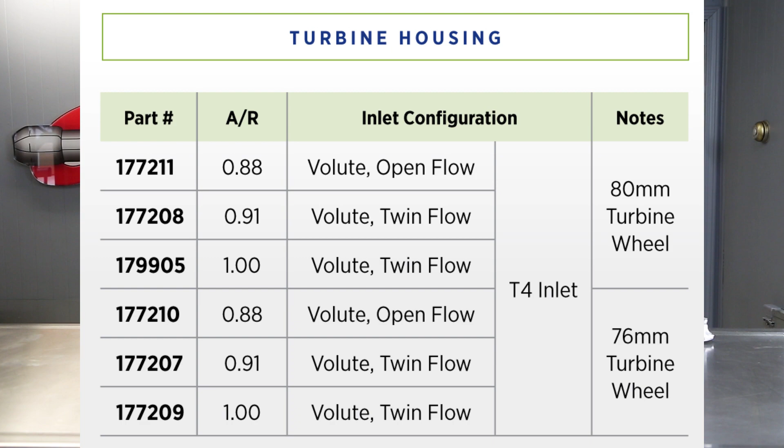And then they're not listed, but with some modifications, Area Diesel can supply wastegated housings if you're looking at a towing application or something like that. All the SuperCore options, mated with all the turbine housing options, gives you a wide variety of coverage for this range of turbo.

When you hear the term S369, they're talking about a BorgWarner S300 model turbocharger with a compressor wheel in the 69mm diameter measurement. So that's really all S369 tells us. It doesn't tell us what size turbine wheel you want to run. It doesn't tell us what AR turbine housing. And it doesn't really tell us the characteristics of the compressor cover. How does everything connect? Okay, so lots of options.

How do you know which option is right for you? That's a tough one. A couple of ways to do it. One is to have years of experience, trial and tribulation, and just know what combinations work with what applications. It's one of the value-added services of reaching out to Area Diesel Service. If you tell us what you've got and what you're trying to do, we've got a real good idea of what it is that you're going to need.

Beyond that, we'll drop you a link to BorgWarner's MatchBot program. It's a little overwhelming, but it is the industry's best publicly available turbo specification tool. Go through, fill out all of your particulars, and it'll tell you what it is you're going to need for flow out of the turbocharger. Compare that to the maps in the catalog, and that's going to give you an idea of what it is you're going to need.

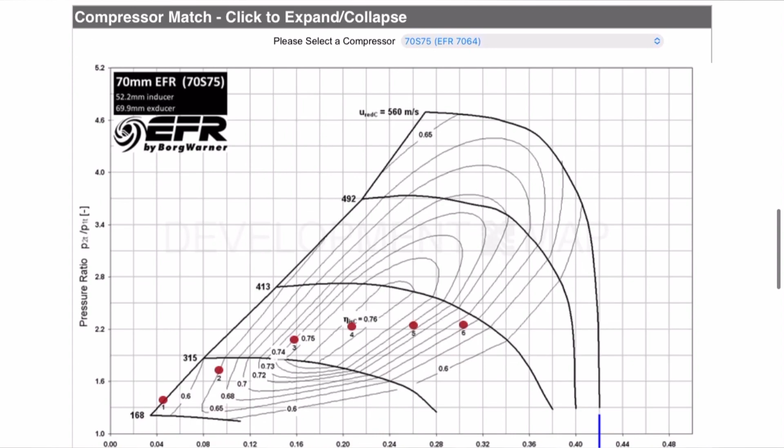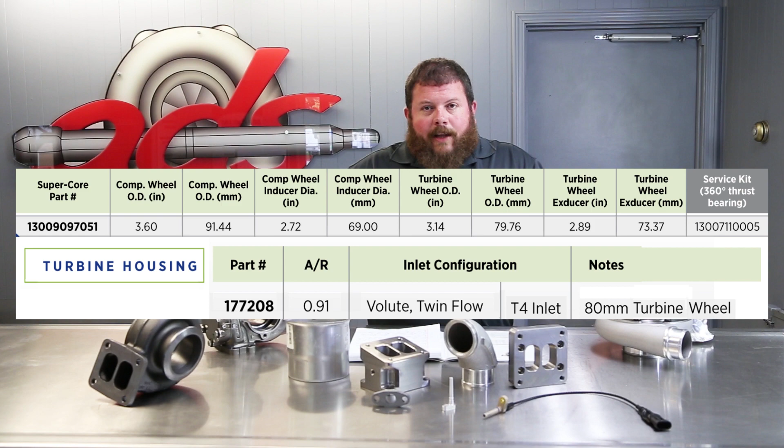This particular SuperCore is an S369. It's on the 80 millimeter turbine wheel, and it's running a 0.91 AR turbine housing. So that is the assembly that we're talking about today. This particular configuration is another collaborative effort between Area Diesel Service and CNC Equipment. So Clinton reached out and they're getting ready to build a truck and they need a turbocharger for it.

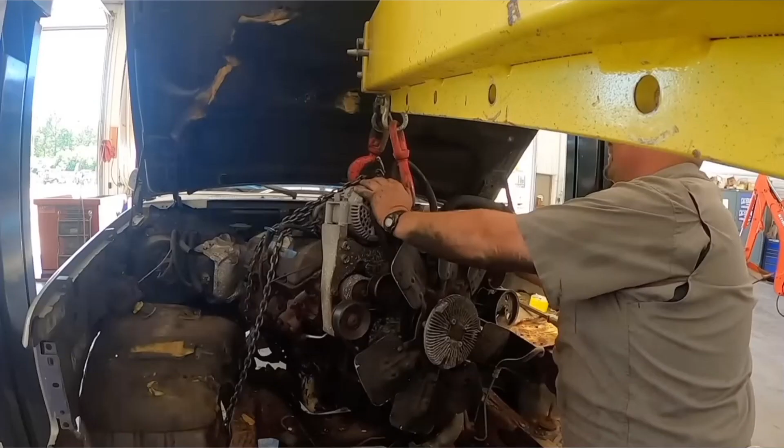If you've been watching Clinton's channel, you've seen a number of videos about an F350 they're working on. This is the truck that was cut in half on their channel. Originally a gas engine. They've got another donor where they're going to acquire the rest of the frame, and then I believe a third donor where they're going to come up with the 7.3 liter engine from. So Frankenstein, if you will, and they're going to arrive at a 97 F350 four-wheel drive Powerstroke short bed truck. So a configuration that was never offered from the manufacturer.

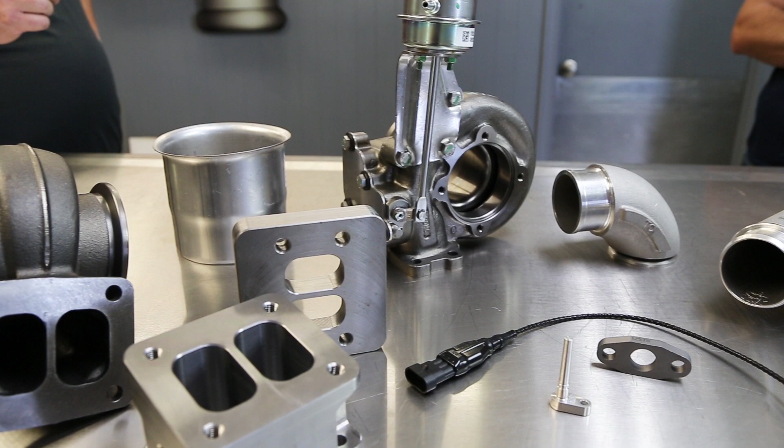Pretty cool. So in order for us to specify or configure a turbocharger, there's quite a bit of information that we must learn and understand. What is the engine? How much displacement? 7.3 liters of engine displacement. At what RPM will the engine be operating? What type of fuel delivery or horsepower is going to be made? What is the application? Is it a tow rig, a pulling rig, a grocery getter, what have you? And finally, what are the goals? Longevity, reliability, performance, all of these things kind of go into the recipe to specify the right turbo for that scenario.

So the guys over at CNC are doing this one proper. It's going to be on a low mileage, 48,000 mile, 7.3 liter Powerstroke. They're going to pull the engine down, reseal everything. We think the combustion chambers are good. They are going to do head studs, valve train upgrades, base engine for the most part remaining stock. 25/100 hybrid Huey injectors going in this thing, being fed with a performance high pressure oil pump, and engine going to be tuned and calibrated appropriately. That's kind of the rundown for the build. They are going to modify, go to a T4 style pedestal to accept the BorgWarner S300. That kind of tells you about the modifications that this turbo is going to be facilitating.

So at this point we've understood Clinton's application. We know the modifications that have been made or are going to be made to the engine, and that's obviously a significant part of the puzzle. The rest of the puzzle, the goals, right? What are we trying to do here? We're looking for something that is going to have excellent throttle response. Transient response is going to be good, no lag, if you will. We want something that's going to be reliable and have a long life in this application, and we want something that's going to be cost effective. And with all of those application situations and requirements, that is what we have arrived at: BorgWarner's S300SX-E 69mm compressor wheel inducer on the bigger option turbine wheel with a 0.91 AR turbine housing. That is the combination for Clinton's situation.

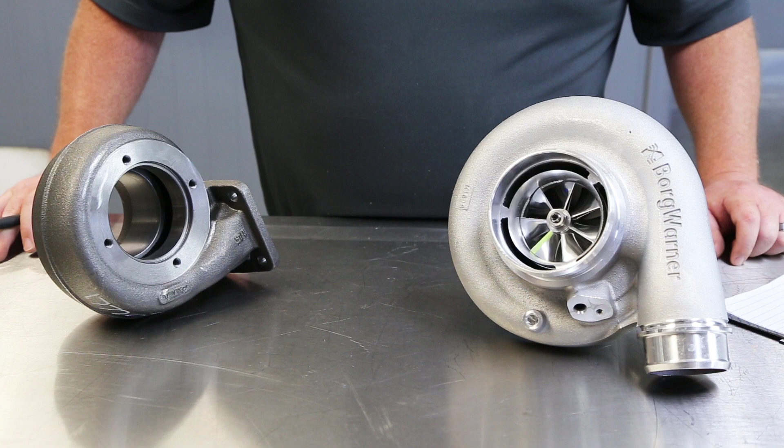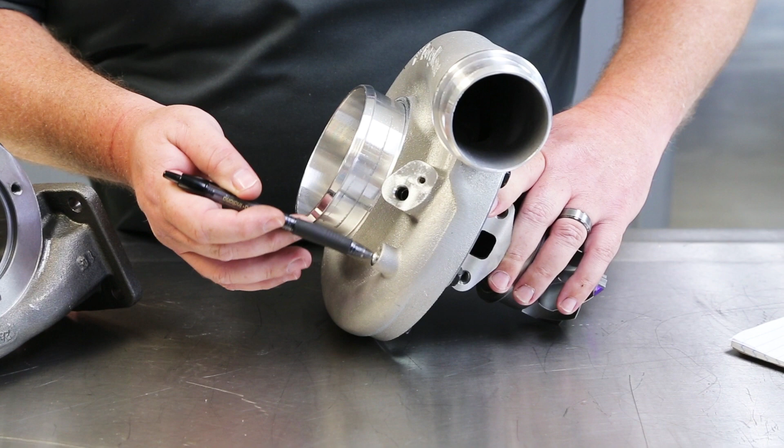Alright, so we'll bring you in a little closer and we'll take a look at some of the particular outline components of this turbocharger. So we talked about the E in S300SX-E being enhancements, right? So 360-degree thrust bearing inside the cartridge, forged, milled compressor wheel. The other enhancements come in the way of the compressor housing. Boost port, this has been machined and tapped but not drilled through. Same situation with the speed sensor port. The features are there. If you go to utilize the speed sensor, you'll need to finish the machining, which is effectively just drilling out the bottom of the passage. Then you can mount your speed sensor.

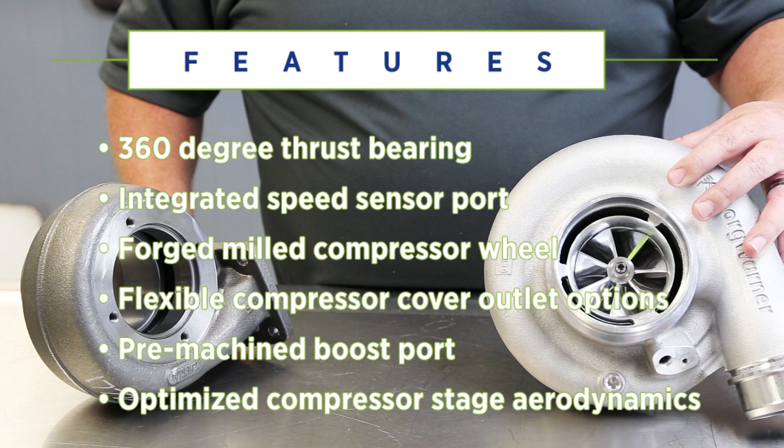The other awesome enhancement they've done, the turbocharger comes with a hose barb compressor discharge, silicone hose and clamp. But if you don't like that connection style, you can machine off the hose barb and you'll reveal a V-band style compressor discharge, from which you can get any number of components made up to that surface, go back to hose, go hard plumbed with your own custom piping, but you now have options for getting the air from the turbo into your engine. Those are primarily the enhancements in the SX-E line of turbos, and it has been well received. This is an awesome setup for you custom builders. 4-inch compressor inlet, readily available components, 2.5-inch compressor discharge, again hose and V-band configurable.

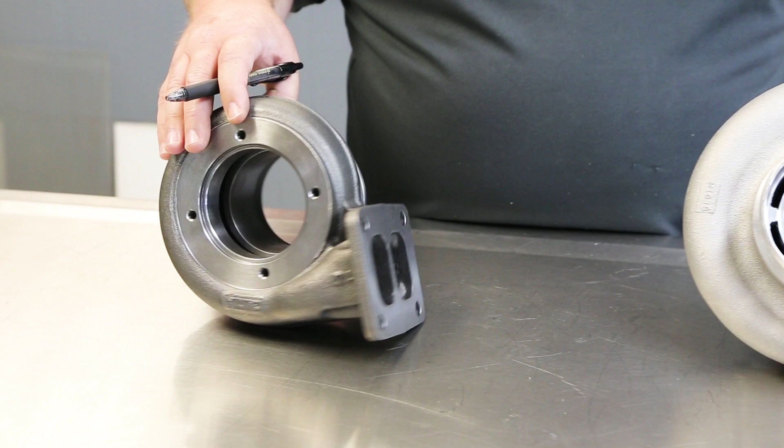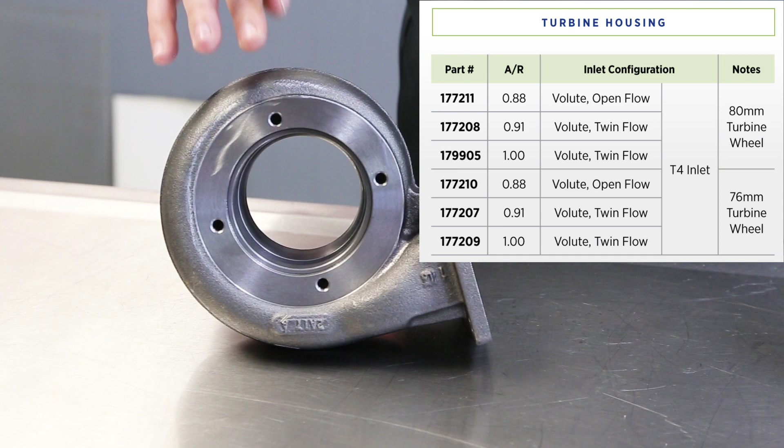On the turbine housing side, again this is a 0.91 AR turbine housing. This is of the T4 foot variety, and there were two other factory options, one smaller, one larger. So again 0.91, you can go down to a 0.88, effectively restricting the flow of exhaust, speeding up the velocity, driving the turbine harder, or a 1.00 if you want to go on the looser side. For this particular combination, 0.91 is the solution.

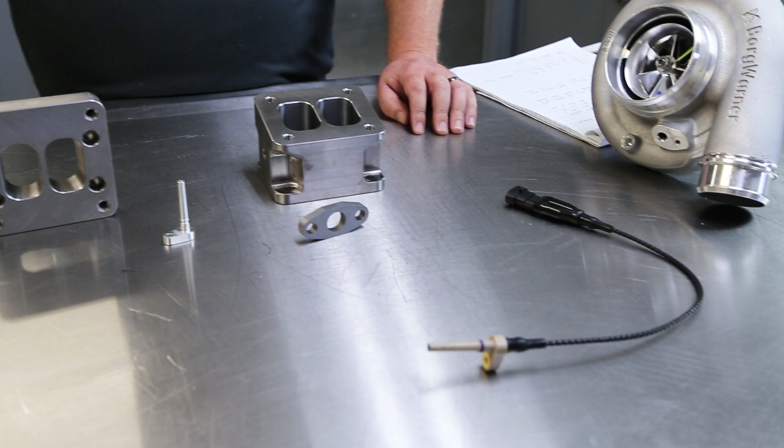All right, if you've made it this far along in your project, you're about to need some additional components. We talked about the speed sensor port on the compressor housing. Again, it's not machined out, but should you choose to measure turbo speed, we've obviously got speed sensors for that, gauges if you are looking for an instrument there. If that's a dyno-only measurement and you're done with the speed sensor, we've also got a plug to close that port back off, seal it up, O-ring and bolt go with that.

If you are plumbing your oil connections, the inlet is just 1/4-inch pipe, that's pretty easy to work with. The drain is flanged, so we've got the flange in a variety of different combinations, gaskets to bolt it up. You can weld off of this, or we've got them that are tapped and available. You can work with pipe thread there.

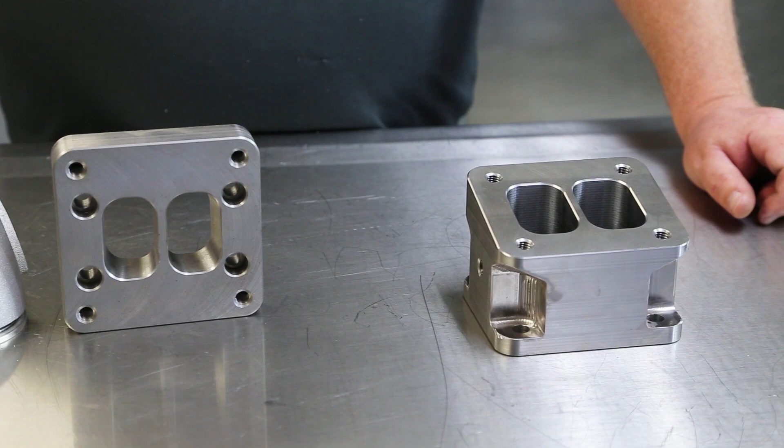Mounting it to your engine, several different options there. You may have an application with a factory T3 size exhaust manifold. We can convert that to T4, so you can mount this turbine housing to your engine without an exhaust manifold replacement. Rollover block, perhaps, if you've got application clearance issues, tapped for exhaust gas temperature or drive pressure instrumentation. A large variety of compressor discharge options.